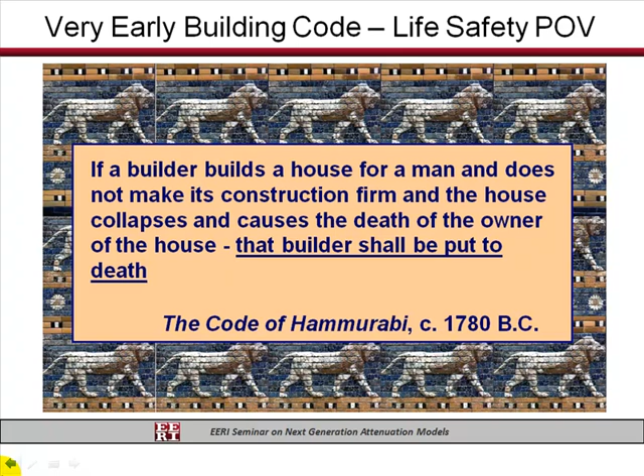Codes are all about life safety. 4,000 years ago we didn't have all this good science and engineering, but Hammurabi knew he wanted things to be safe. He had a different way of achieving that safety, basically by putting the monkey on the builder's back. But we still think that way in terms of life safety.

But we don't think just in terms of life safety. We are thinking a little bit beyond that. Life safety is still the primary point of view. If you look into the commentary of these documents, they say very clearly our primary purpose is to avoid serious injury and life loss. We also want to keep critical facilities open. We would also like to minimize damage, but the primary way we do that is to keep the building standing in rare events. That's the focus.

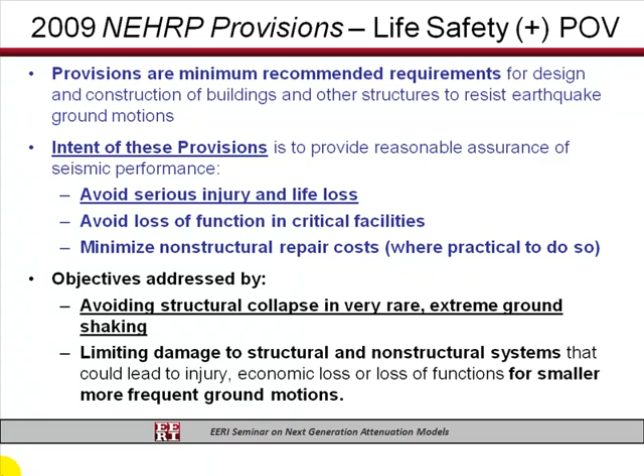The words you see here are the new commentary of the NEHRP provisions, and these words were wordsmithed over and over. There's no 100% agreement on this. We try to get what we think we're doing in codes down on paper, but it's amazing to watch how these things morph as people ask, well, what about this? What about that? But again, life safety is the primary focus.

In the building code process, when you go to a building department and say I'm going to do something, what are the rules? That's a code, that's a law. It's where the building department, the jurisdiction of that authority—could be a state or local jurisdiction—has adopted some rules for building, designing, and constructing buildings.

They can't develop those rules from scratch, so they turn to what we call model building codes. The major model building codes are done on a national level, and they include things like the 2006 IBC, the current model building code, the International Building Code. It used to be the UBC, now it's the IBC.

Some years ago, they got into a little turf war with the fire guys, the NFPA, and the NFPA came out with their own version of a building code. So there are actually two national building codes, but the IBC is the dominant one. Application of this in a code sense is on a regional basis, where a jurisdiction, like in California, says, I'm going to take one of these model building codes and tweak it.

I'm going to add things to it the way I like, and then I'll make it my code. So we have regional codes such as the California Building Code, where I'm from, which is a derivative of a model building code plus some stuff that the state wants to add on their own.

Major cities will do this: Los Angeles, Seattle, San Francisco. They will also have their own building codes where they take a model building code and before they adopt it, do some tweaking. Now, model building codes do not come out of thin air.

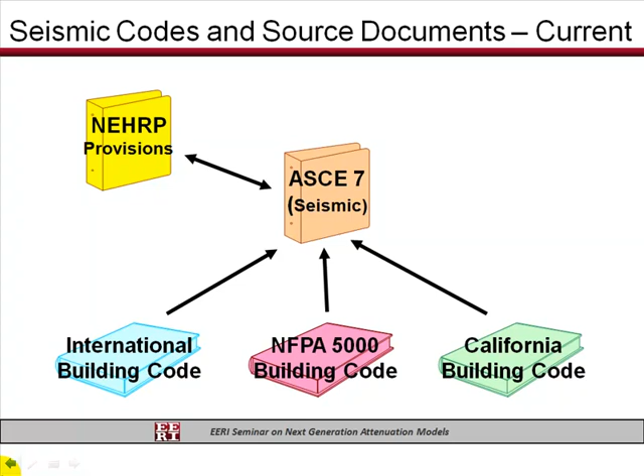But the ASCE 7 is still heavily linked with the NEHRP provisions. And so at this time, what you see in NEHRP and what you see in ASCE 7 is really much the same thing. And in fact, the way the process is working right now is that the real work on developing new ideas is done first and put into the NEHRP provisions. And if it flies in that process, if it sticks, then it's put forward into ASCE 7. And if it sticks, then it's put forward into the International Building Code.

And so the first step in the process is for the Building Seismic Safety Council, who's in charge of the NEHRP provisions, and their committee, known as the Provisions Update Committee. Catchy name, Provisions Update Committee, because you update it every 3-5 years. That's where that real work is done, and the group I'm going to talk about is part of the Provisions Update Committee. The Seismic Design Procedures Reassessment Group was a subset formed specifically to look at this ground motion criteria.

So that was where the work began about 3-4 years ago. We developed our ideas about 2 years ago, brought them forward to the PUC, and eventually got them into the NEHRP process.

Toward the end of that process, these new ground motion ideas were brought forward to ASCE 7, through the ASCE Structural Engineering Institute, which is in charge of this document. They have a special task group for seismic, so that committee had to stew on these same ideas, and they just recently passed them.

Now that they're passed, they're being brought forward to the International Code Council, which is in charge of the IBC, and they'll have public hearings at the end of this year and early next year. If all goes well, this thing that started 4 years ago will end up in the 2012 IBC. So that's just a long and torturous process.

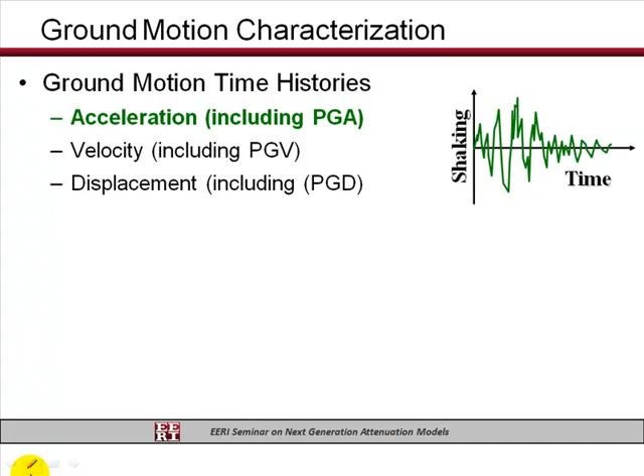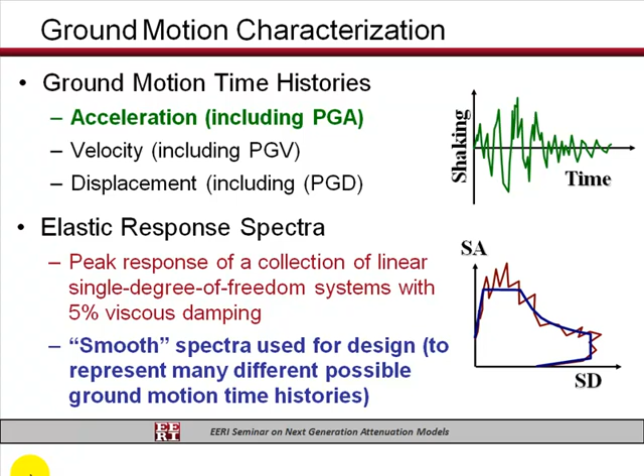We design buildings with some coefficient that somehow represents that ground motion. And to do that, we transform the ground motion into a response spectrum, which has got little zigs and zags and peaks and valleys. But we know that if we look at a bunch of them, they have trends, and those trends lead us to an idea of having a very simple, smooth, generic shape. And the coefficients are essentially defining the domains of that shape. And this is what the code shape looks like.

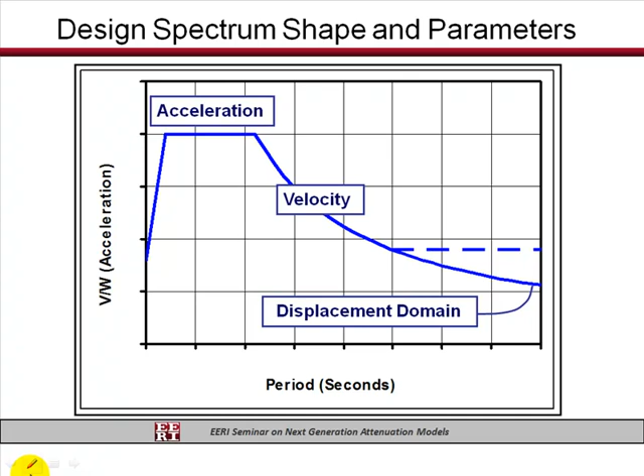It has an acceleration domain. I know for many of you this is not new stuff. Acceleration domain controlled by one coefficient, a velocity domain. It even has a displacement domain for very, very long period structures we're not going to worry about much. And these coefficients, the spectral acceleration used for design at short periods, S sub DS, is the acceleration domain coefficient. The coefficient S sub D1, spectral acceleration used for design at 1 second, which would then be divided by T to get it at other periods, is again the other coefficient that defines the spectra.

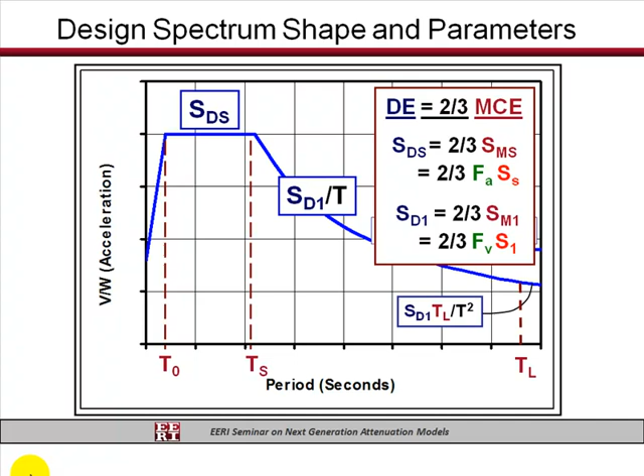And then there's some rules about how to get the transition periods between one domain and another. But what is important is that these design coefficients that go into the base shear formula are 2/3 of the MCE. When I'm talking about an MCE, we take 2/3 for design. But we're not done there. People say, why do you take 2/3? You've changed the return period, all that good stuff. Oh, if that were only true. Because after we take 2/3, then we divide by R before we design the building.

Now, R is a factor that accounts for inelastic response and displacement, inelastic displacement capacity and ductility and damping and all sorts of stuff that we study other ways. But that number is somewhere between 3 and 8. So actually, the MCE is multiplied by 2/3, and then it's divided by something like maybe even as big as 8, before we design the building for those forces, with the assumption that it has the capacity under very rare ground motions to still stand up when it sees that thing that is bigger. And we have reason to believe that's actually true most of the time. But these are all the formulas that the engineers are using that are in Chapter 11, Section 11.4.

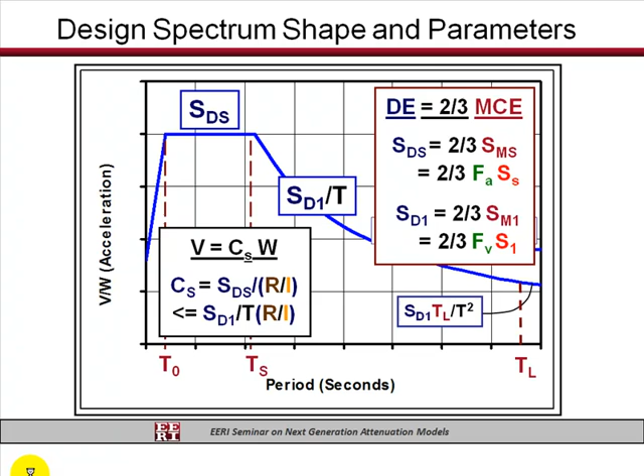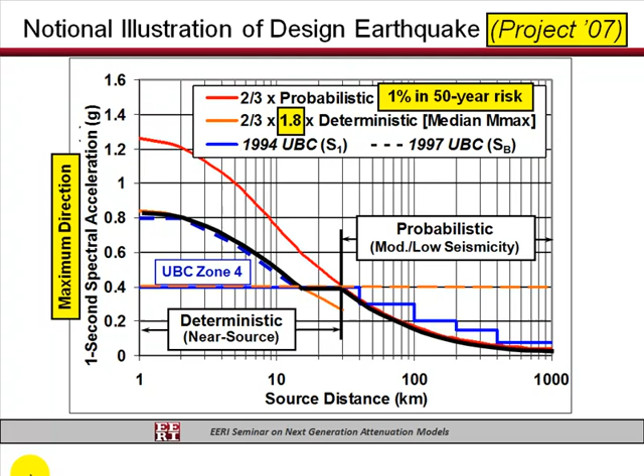We're now discussing how to bring that back up some. Why did we do that?

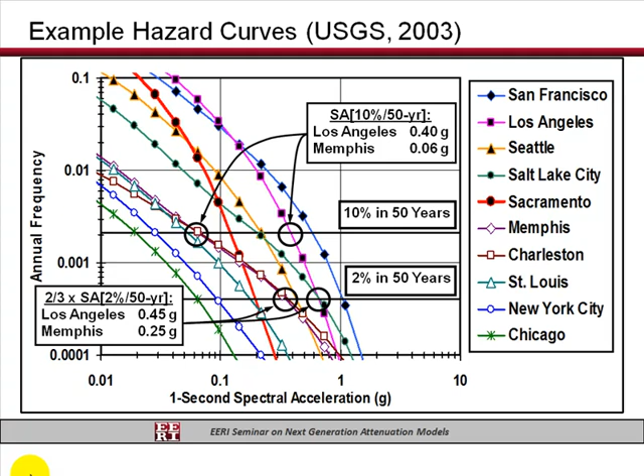So our thinking was we needed to move to a more extreme view of return period to capture these events for places like Memphis. And that led to this map last cycle.

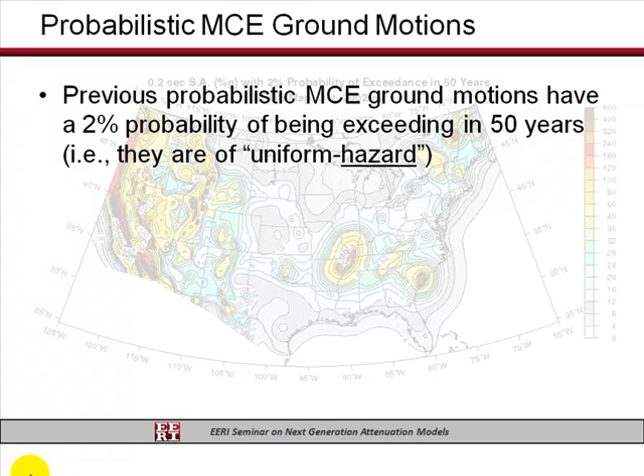Now, that's fine, uniform hazard, 2% in 50 years with all the rules I described. But maybe that's really not what we're trying to do, because getting uniform hazard isn't what the code's trying to do. Getting uniform protection is what the code's trying to do. It was recognized all the way back in ATC 3, the forerunner of the NEHRP provisions, that uniform hazard does not mean uniform risk. It was just the best we could do at that time. And now what we're saying is we can do better.

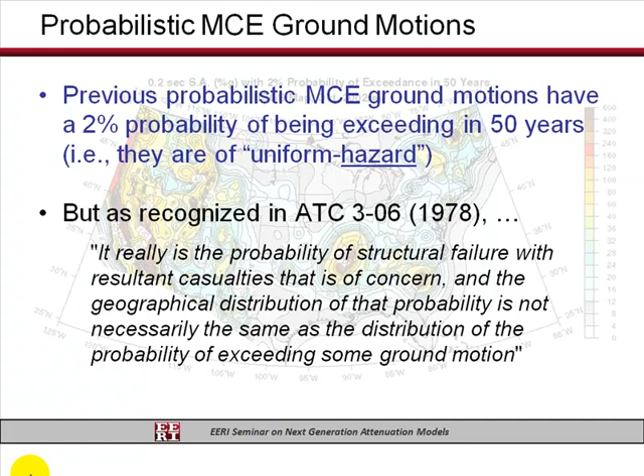We can actually pick ground motions on the basis of achieving more uniform risk in terms of avoiding structural collapse. So that's the big change, moving from hazard to risk. It doesn't actually change the numbers that much, but conceptually it's a big change.

So if we design for 2% in 50 years, we don't necessarily get uniform collapse. We've decided we can aim at a risk goal, and the absolute risk goal we're aiming at is a collapse risk objective of 1% collapse risk—1% of the buildings collapsing, if you will, in a 50-year period.

We had big debates about whether it should be 1. We believe in round numbers, so there are no 1.1s in this game. There might be a 1.5, there might be a half, there might be a 2, but there's no 1.1. The precision just isn't like that. But this seems like a very reasonable objective, consistent with having a 2% in 50-year hazard for a lot of regions.

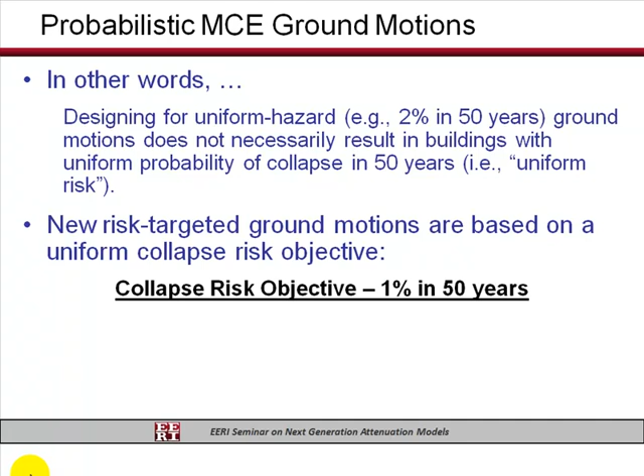But to get there, we also have to have a conditional objective. We have to know what we think will happen if there is the MCE. What do we think is acceptable if this rare big earthquake occurs? What fraction of the buildings, if they collapse, would still be deemed acceptable? That conditional probability, given the MCE, is 10%.

So two major assumptions in these new ground motions: first, 1% in 50-year absolute risk, and a conditional probability, given the MCE occurs, of only 10% collapse rate. That one causes a lot of heartburn because that's a pretty big number, but it's a very, very, very rare earthquake.

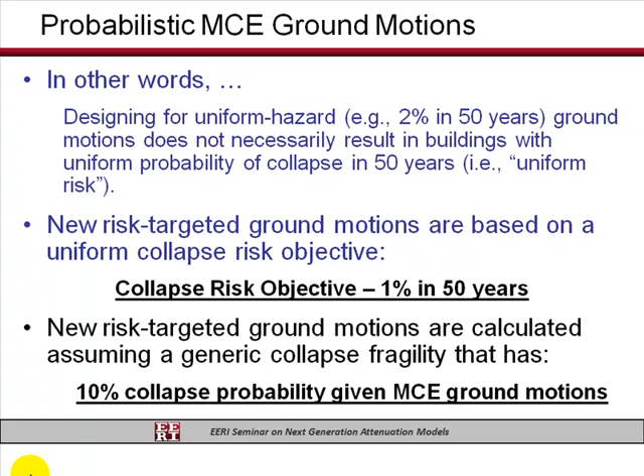So I'm going to show a couple things about how we get to these answers, and Nico is then going to, after you get really confused, explain it to you. So don't worry. To do this, we have to find a way of combining the hazard functions I showed you before with some fragility curve representing the structure's performance.

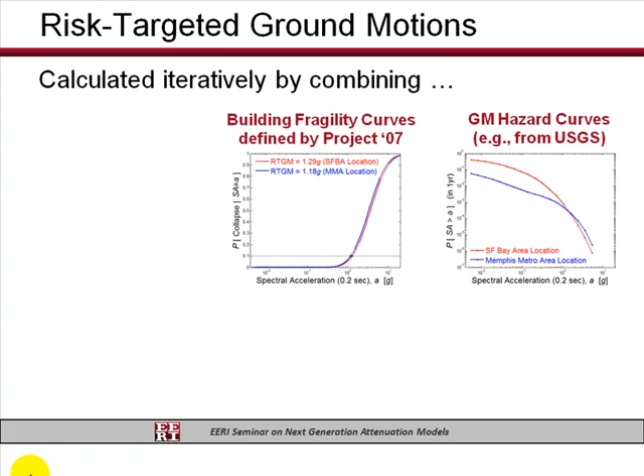to get this calculation of 1% risk. It's done through what's called a risk integral, and it's fancy stuff, but that's why we got the USGS there working for us.

Point is, I want to talk about this so-called fragility curve, the collapse fragility curve, because the first time structural engineers hear this, they say structures don't have the same fragility curve. All the structures are different, and that's true. But for the sake of this calculation, we assume a generic curve.

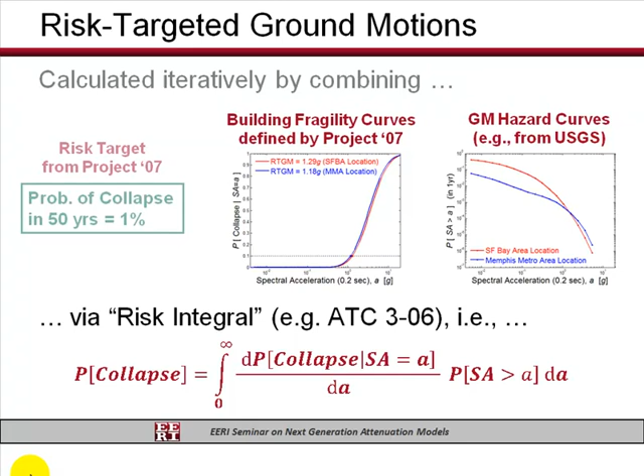We assume that all the structures being designed using these ground motions are achieving that 1% risk goal. So for the engineers in the group, we're not saying the buildings will all perform the same. We're saying we hope they would do this, and if they do, then we know how to make the adjustment for the ground motions. Somebody else has to fix the other side of the equation, which is the R factors, to achieve that uniform fragility for all the structures. So this is the function of the risk calculation.

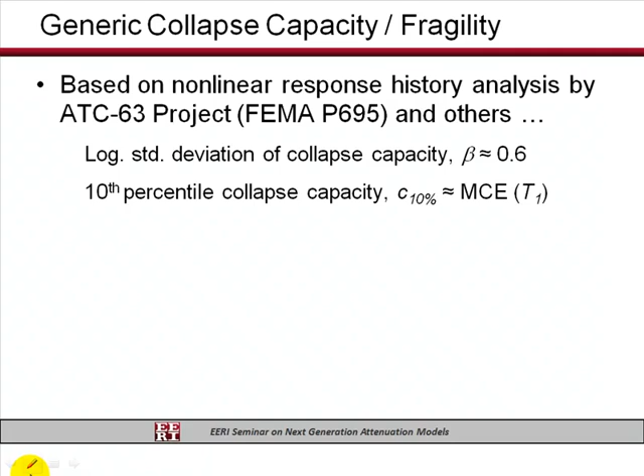I mentioned this because part and parcel of this calculation is the assumption that given the MCE, you have no more than a 10% chance of collapse. We have reasons to believe from various projects like ATC 63 that this is a reasonable assumption, and it's consistent with the commentary of the NEHRP provisions, which says given an MCE, we should have a relatively small probability, not zero, but relatively small, of collapse.

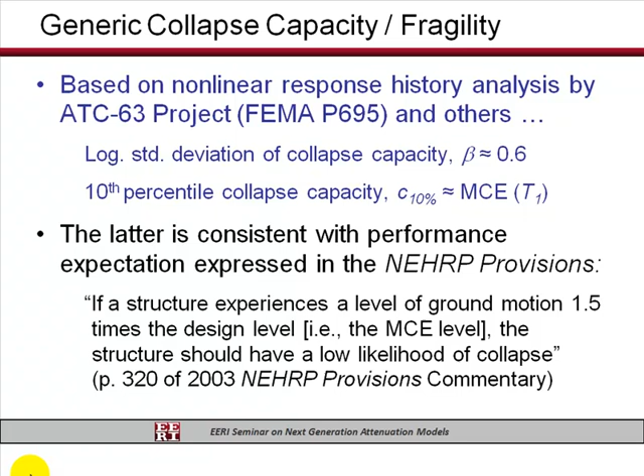Let me move on to ground motion intensity, because just understanding the terms is difficult, so let me show some pictures to help understand what we're talking about here.

The NGA functions, like most attenuation functions, are based on a geometric mean measure of intensity, or some version of geometric mean. We chose a different definition for the purposes of putting ground motions into codes. Let me explain what those two things are, because they're not necessarily clear to everybody.

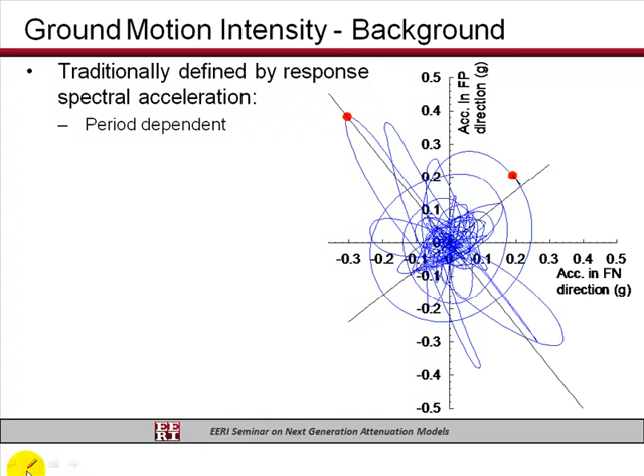We get different answers depending on whether you're at short periods or long periods. The geometric mean is the square root of one component's spectral response times the spectral response of the other component. And this varies, as I said, with the XY orientation of the traces, the way they were recorded. So it's got some record orientation issues.

The NGAs used a very fancy way of calculating the geometric mean to help remove that orientation issue. So it's kind of resolved some of that. Turns out it's about the same answer as the geometric mean. So the good news is, the bad news is it's complex; the good news is it doesn't matter too much.

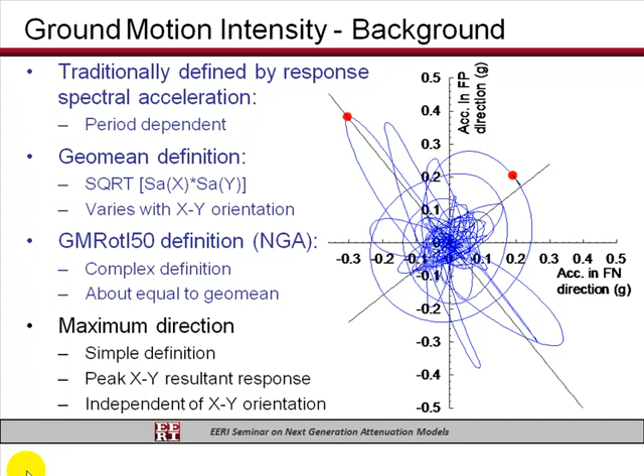We chose a different way, which says we want to look at the maximum as our definition for code design. I'll tell you why, but that's the red dot here instead of the product of these other two. So we're looking at the resultant in the horizontal domain. What am I talking about here?

Here's a trace from Kocaeli - a very strong earthquake record from the Kocaeli earthquake in '99 in Turkey. To calculate a response spectrum, we run this record through little lollipops of all different periods. These lollipops have only one direction of response, but you could run them simultaneously to get that combined response.

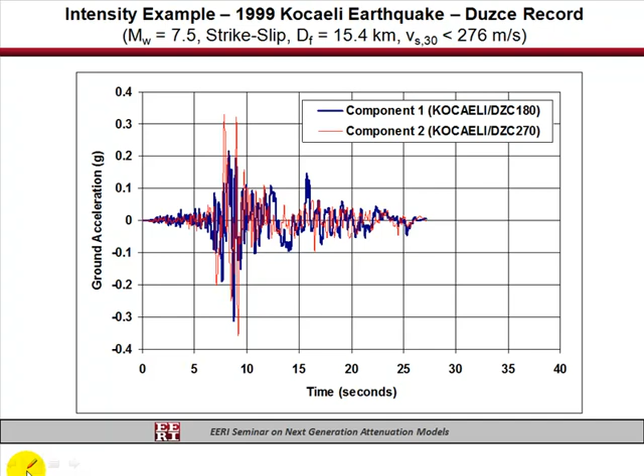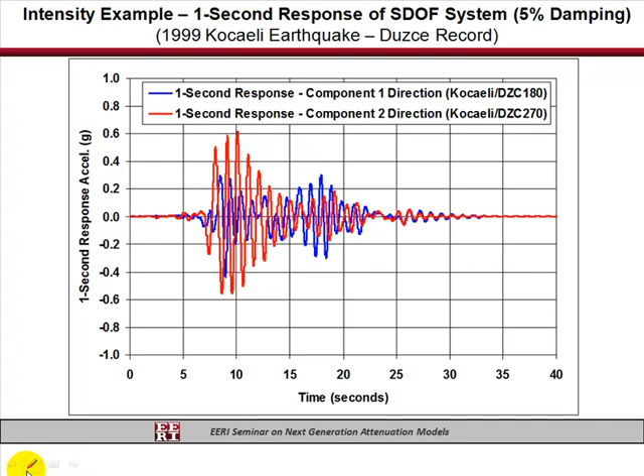And if we ran these two components independently through these lollipops at 1 second - one of many periods - we'd get these traces. This is the linear elastic response of a 1 second system to the Kocaeli record. Then, to calculate the geometric mean, we'd find the peak in component 1 direction and the peak in component 2 direction, wherever they occur during that response. We multiply those together and take the square root - that's the definition of the geometric mean.

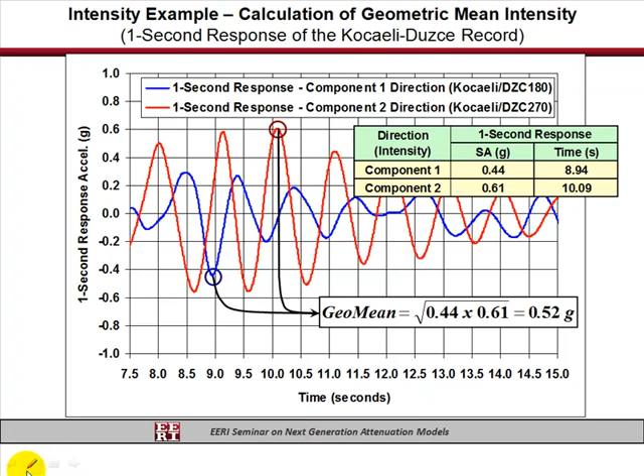As an engineer, I don't know what that means, because they don't occur at the same point in time. So it has some statistical nicety, but it doesn't necessarily have engineering significance.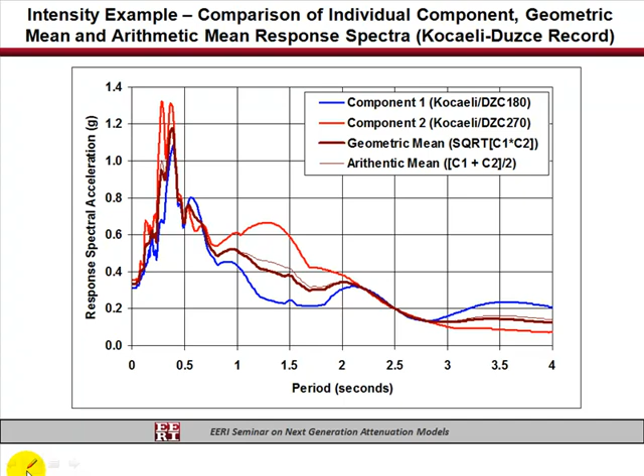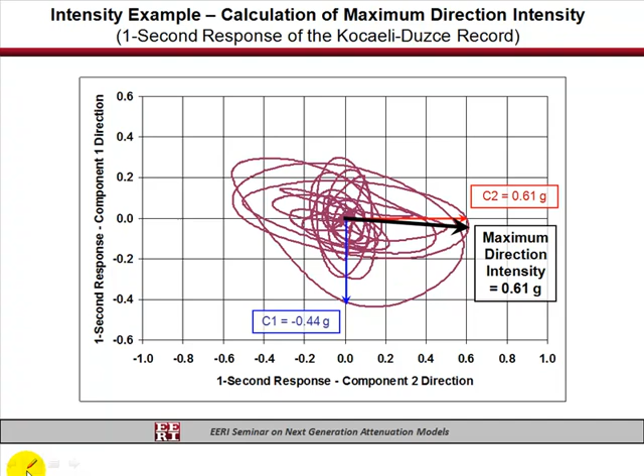The maximum direction idea goes back to the notion of response spectra - finding the maximum response, not caring when it occurred during the record. Only this time, use a bidirectional horizontal response of that one period structure and look for the resultant. That's the maximum direction, so it's really a response spectrum idea applied in the horizontal plane.

Turns out it doesn't change too much in this case. Here's a comparison of the resultant in the horizontal plane versus the geometric mean. Sometimes they're very close together, sometimes they're not so close together. If we do some statistics on it, you can find that there are patterns to how much they vary.

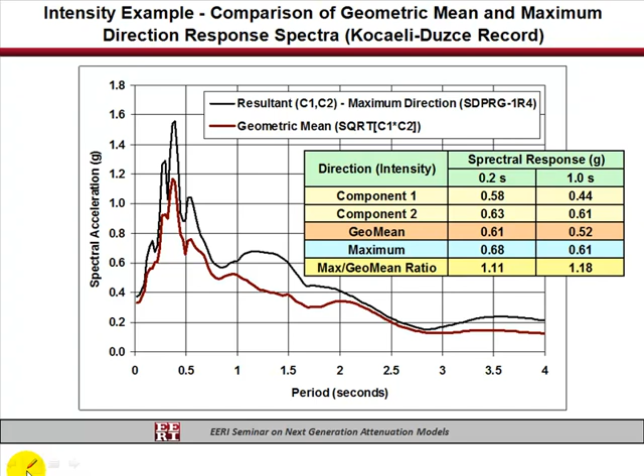That's important because when we wanted to use the maximum direction, we had to have some rules about how to convert the equations that are based on the geometric mean into the maximum direction. You can see that at short periods, it's about 11% difference and about 18% in this particular record.

In fact, we had a study done by Andrew Whittaker and Yin-Nan Huang, his student at the time, and Nico, to take a look at how these trends occur between this maximum direction and the geometric mean. We found that it's about 1.1 at short periods, about 1.3 at 1 second. And in terms of looking at 84th percentile response, which we need for the deterministic, it's about 1.8 difference. That's where we got that 1.8 number that went in lieu of the 1.5 in the previous code.

So we did some homework to figure out what these numbers ought to be. These were for near field records because that was our focus at the time. There's been some other studies by other folks that would indicate similar sort of numbers would occur in other regions than near field.

So why do we care? Why do engineers care? Building design considerations. We care because we design one building direction at a time, and we've got to get it right, understanding that the earthquake will apply loads in both directions to the building.

If we take a set of records and apply them, each record, to a one-directional analysis, and ask ourselves how much bigger do I make them before I get half the records to drop the building - as opposed to taking the same set of records with their XY orientations to a three-dimensional model and scaling them up - we find that the collapse point is different. In fact, records along a single axis are approximately 20% less likely to collapse a structure than when the same records are applied in a bidirectional sense.

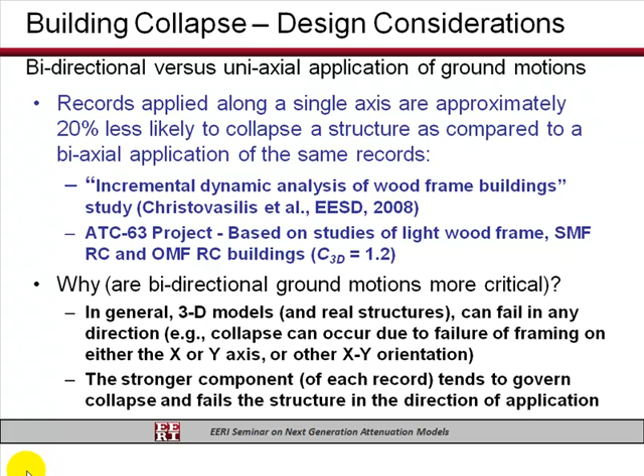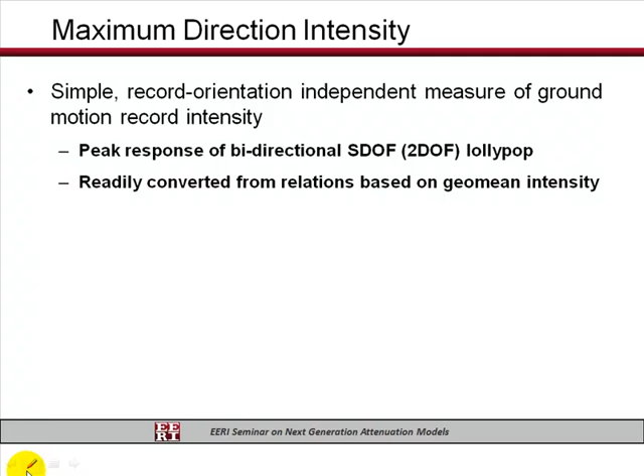So we said let's use maximum direction, based on this 2-degree, or this lollipop with complete freedom in the horizontal direction. It's readily converted from the existing geometric mean intensity. Ron's telling me to move along. And it's appropriate for ELF, or equivalent lateral force design, and it is appropriate for scaling records.

When you're actually going to apply records to a building simultaneously, you don't take the maximum in this direction and then say it's the maximum in this direction too. There's only one maximum. So we've made some other adjustments in the code for time history analysis - instead of scaling to 1.3, we now scale to 1.

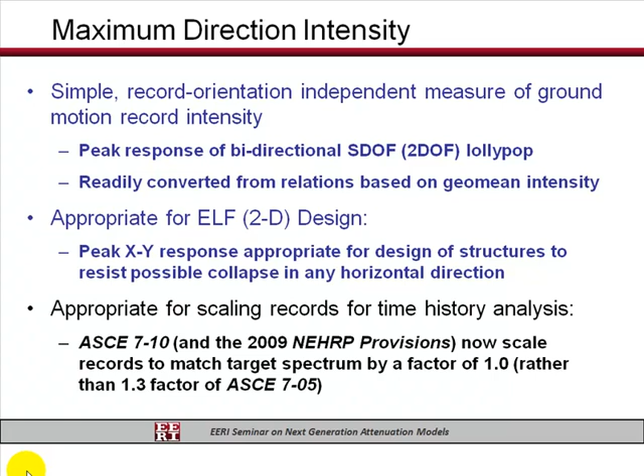So this 30% adjustment that's in there for ELF comes back out when you're doing time history analysis. And just to compare, here's that same record I showed you, here's a comparison of the record with the maximum direction, that's the black, and the geometric mean, which is red.

The prediction from the NGA, I looked at this and said, oh my gosh, NGA is low. But you see, every record's different. It turns out that this record is above the average.

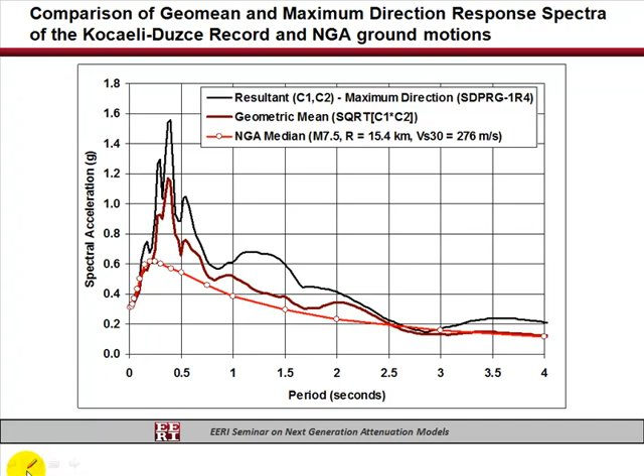So I went back and said, let's take all the records in a class that I'm interested in: all the big magnitudes, all the strike slip records, all these CD soil types, which is almost all of them, within say 20 kilometers of the fault. So all the records that are most important to me as an engineer.

Out of all the thousands of records in the database, there's 11. Only 11 that match that, for the Seattle fault, the one we're trying to characterize here. Now that's good. The good news though is there used to be 4, before Turkey there was 4. So we're up to 11. But the point is there's only 11 out of thousands that really matter a lot to drive this.

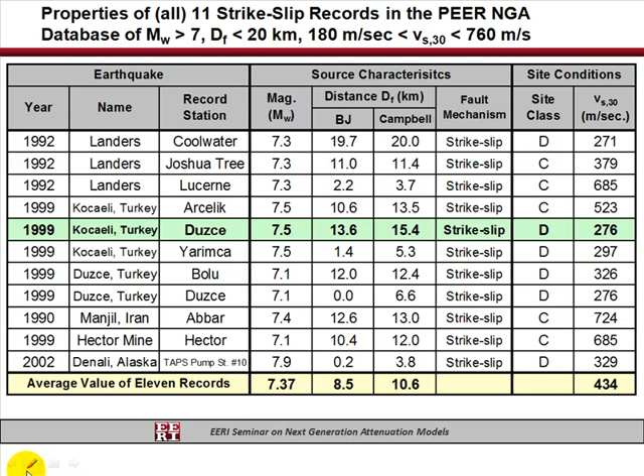But if I take those 11, I predict for each of those 11 what they're supposed to do, and take the average and compare that prediction with the average of these guys' spectra, it turns out it looks very good. The blue curve, which is a little zigzaggy, is the average of the actual spectra of these 11 records, and the red line going through it is the average of the predictions. So the NGA is doing a very good job of emulating the data in the database for these 11 records.

That's the good news, they work really good. The bad news, which is not anybody's fault, we just haven't been around long enough with enough instruments, is we still need a lot more data. Because after we have the next big strike slip event and get 50 data points, going from 11 to 61 data, I'm just going to bet the average changes, that these statistics are going to change. So remember, we just don't have all the data we need yet. And guys in codes, like myself, code committees, we have to be aware of that. The big ones that really dominate our thinking have a limited number of data to support where we are at this time.

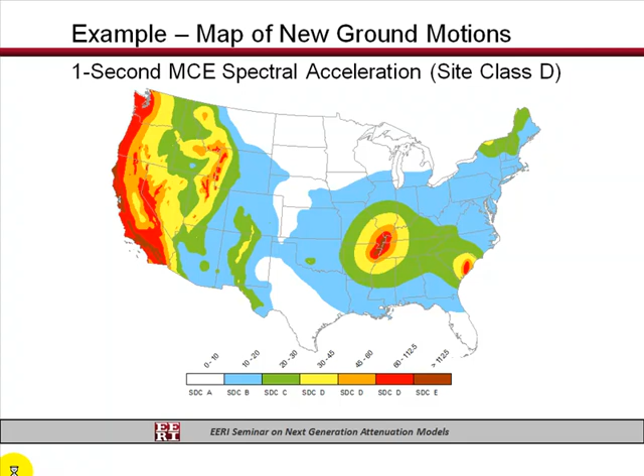Okay, there's a ground motion map of the US. Let's take a look, before I run out of time here, at 34 cities. You know, when we come forward with these committees, no matter what you say in the theory, you can say anything you want in theory, the first thing out of the mouth of anybody in the room is, yeah, but how much is the number going to change? And you go, I don't know yet. So we sat down, took 34 cities, spread them out through the United States.

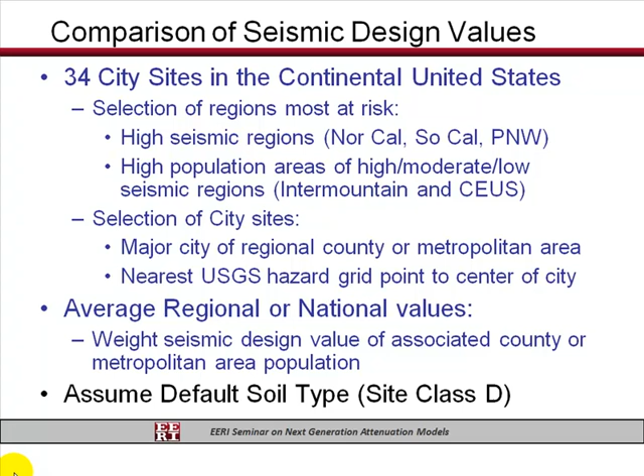With the help of Nico and the USGS, we developed what the numbers were going to be for those cities and could compare them with the current code and future proposals. We tried to pick areas of major interest, and when we put together averages, we tried to weight them by the population exposure. So if there were two numbers to be added together to find the average effect, we tried to normalize that by the exposure, the population in the regions. And because we don't know actual site conditions, all these are based on an assumed site class D, not the nominal site class D situation, because we actually don't know the sites for these 34 cities.

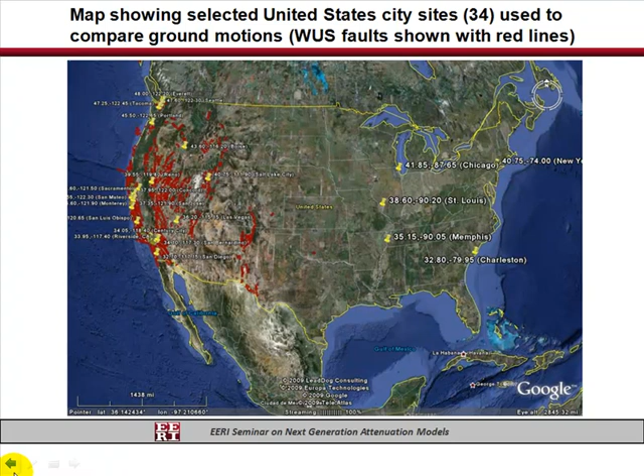Okay, so here's a Google map of the US, the little thumbtacks are the cities. We spent more time in the west than the east, but we did hit Chicago and some of the big ones in the east, New York, Charleston, Memphis, St. Louis. Here's an overlay of that probabilistic map I showed you, kind of give you a sense for how it's going. Let's focus on the Pacific Northwest.

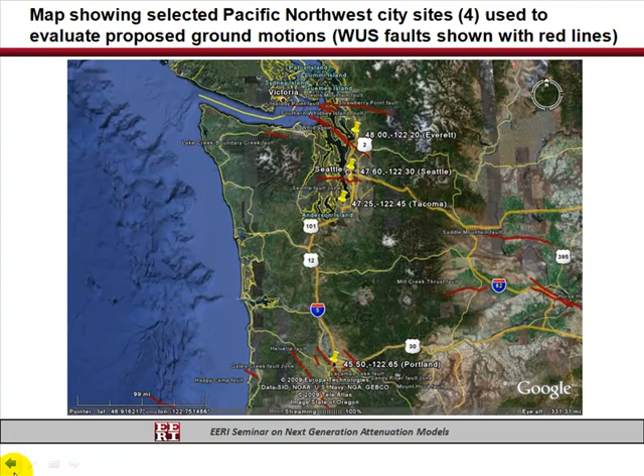Where we had thumbtacks at Everett, Seattle, Tacoma, and Portland, which represents the counties that those cities are in, representing about half of the populations of Oregon and Washington. And this is the statistics. We need these lat-longs to actually go into the USGS database to get the numbers.

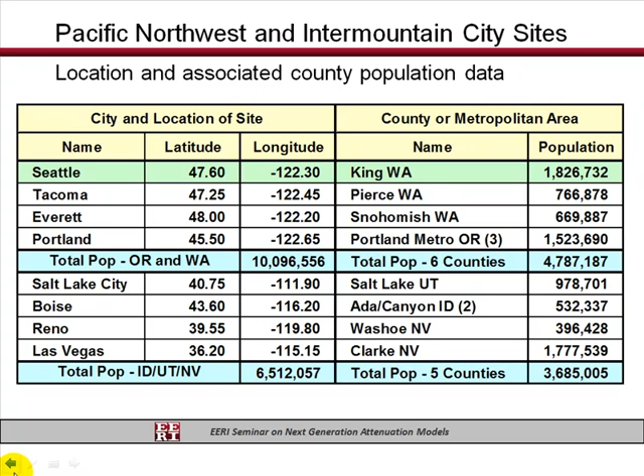At the time we did this, the USGS only had a grid of points, so we had to pick a thumbtack nearest one of the grid points in the database, and this was the best one for Seattle. It's about 2 to 8 kilometers from the Seattle fault zone, so you're pretty close to it. You also have the deep subduction event as a contributor hazard, but very much also a local event.

If we go back to the hazard function and ask what is the return period of the ground motions that give us 1% risk, it turns out to be about 2,000 years. We tend to see this - the 1% risk in a lot of regions of the US turns out to be more like a 2,000-year return period.

The other numbers on that line are the individual contributions from deterministic and probabilistic and risk coefficients that you would find in the NEHRP provisions. We roll them all together into ASCE 7, so you don't see all those pieces, but you can get those out of the NEHRP provisions.

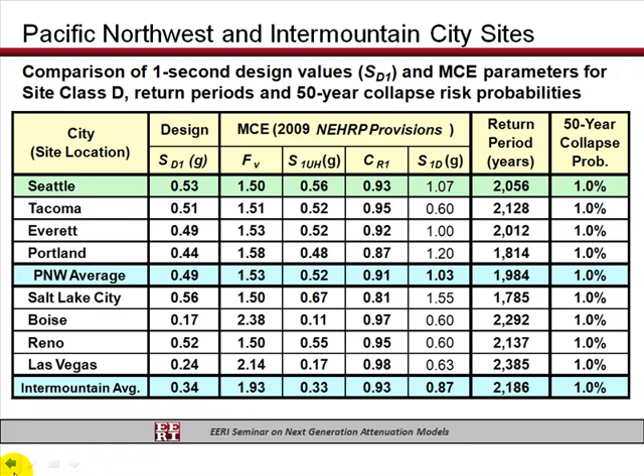When you roll them all together and take 2/3 of the MCE, you get 0.53 G at 1 second for the design coefficient. How does that compare with the previous version of ASCE 7?

Again, the top row - the new code will have 53%. Used to be 49%, used to be 56%. The UBC thought it was 54%. In '97 and '94, the UBC thought it should be 56%. By and large, it's the same number. I think you're going to see that trend - it's by and large about the same number.

If we average all of the Pacific Northwest, the average of the counties we looked at would give us about 49% G, compared to 44 previously, compared to 46, compared to 54 for the UBC. So actually you've been using the UBC for design in this area, and in fact it's lower than what people have been using traditionally by a little bit.

Same story for short period accelerations - very similar numbers, more or less the same, in fact a little bit lower than before at short periods.

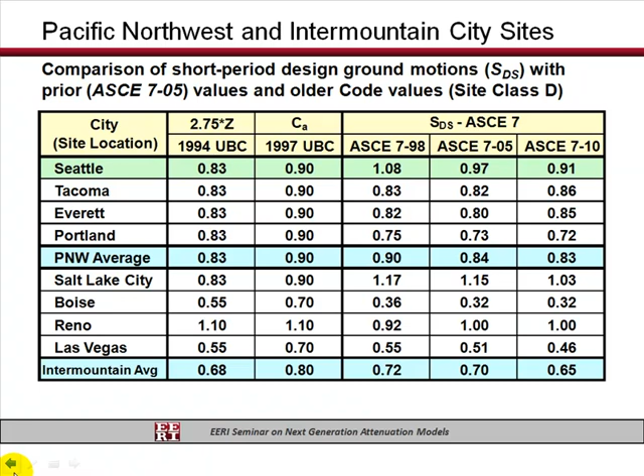If we look across the whole United States, we're looking at regions - Southern California, Northern California, Pacific Northwest, Intermountain, Central and Eastern US. We can make the same sort of comparisons. I won't go through them all, but if we average the entire United States, weighted by population, the average design coefficient at short periods is 72% G.

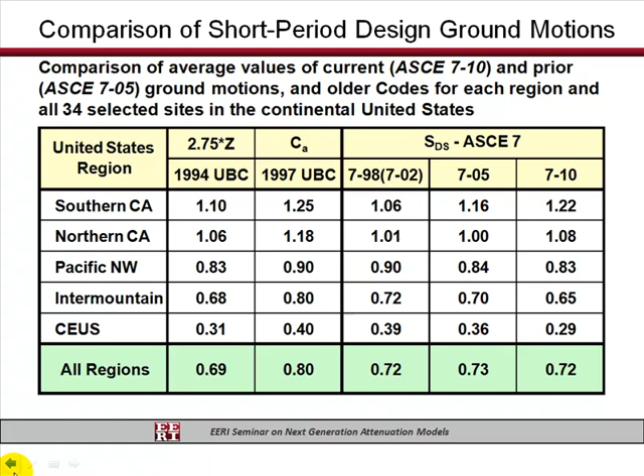Used to be 73, used to be 72, so it's about the same. We like to think we don't yo-yo a lot in codes. If your particular area goes up or down, it's because of underlying changes to the seismicity and hazard understanding of those things.

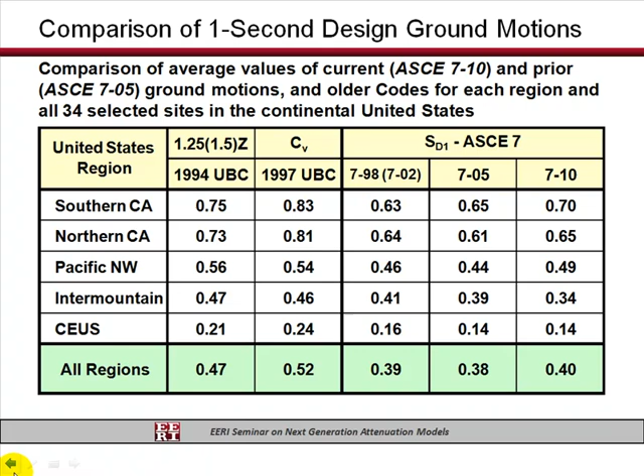It's an ongoing process. We're through NEHRP, we're almost through - I think we're through ASCE 7, but it is still being put forward for consideration in the model building codes, which means the IBC. So it's not done with respect to the IBC yet.

A word of caution: all these ideas that I've been talking about come as a package for code usage. You can't cherry pick. You can't say, oh, I'm going to use the NGAs because they really lower 1 second response, and not use the other stuff. No cherry picking for designing buildings.

Now all this is very confusing, but the USGS has a wonderful website, and there are GIS tools like Google, which you've seen. So the delivery system for engineers is going to be through web-based software. You type in your building's lat-long, which you can find from Google in 2 seconds, and these coefficients for designing buildings will come back to you. So all this good stuff is just background, but when you go to use it, it's a lot simpler. With that, I'll close, and thank you very much.